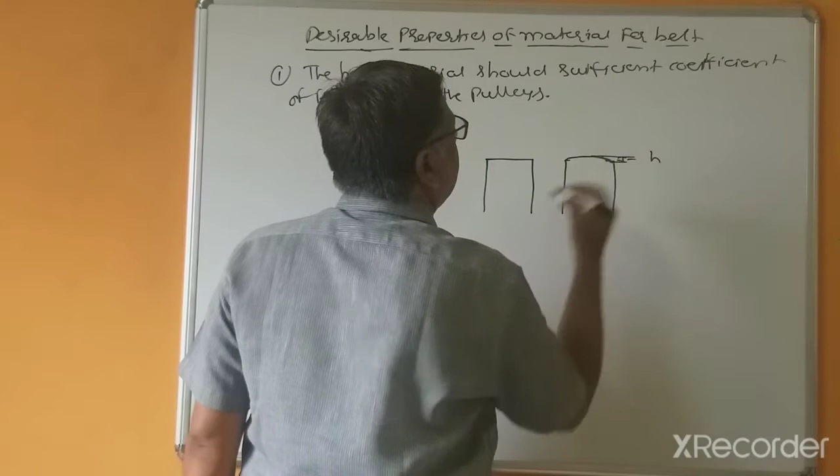So this crowning - this is called H, and this is a flat pulley, and this is a pulley with crown. This crown is for avoiding slippage. That's why here the belt runs likewise, and here belt.

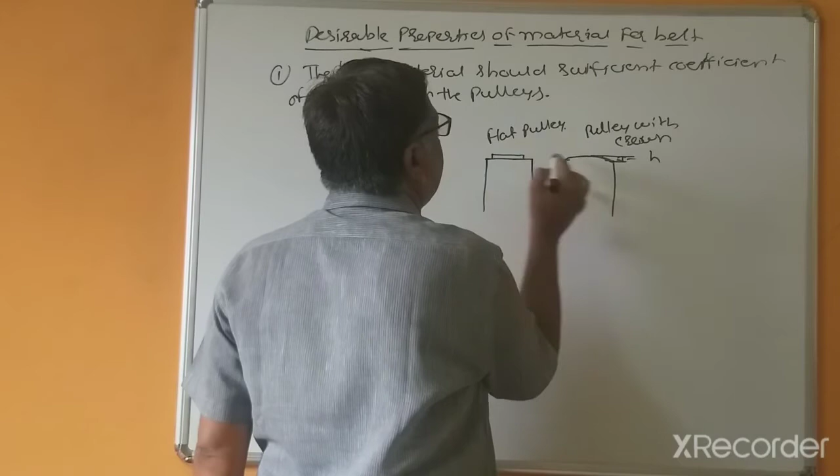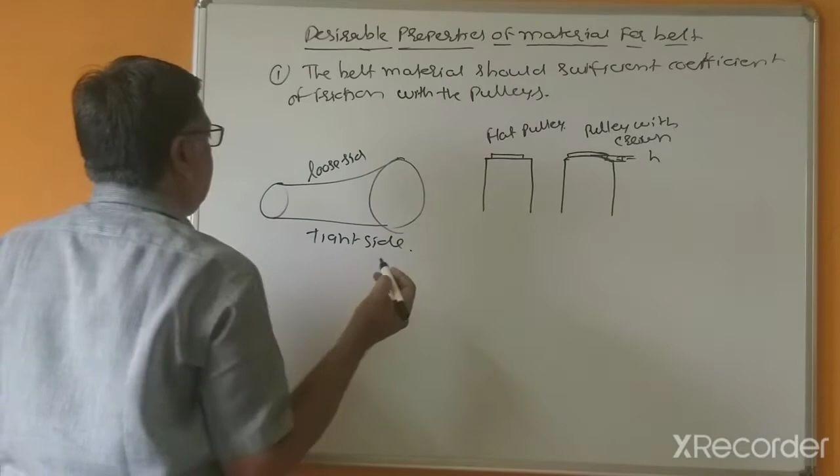That's why such type of belt drives we can use for vertical positions, because in horizontal positions - this is horizontal position - generally such type of arrangement, this is the tight side and this is the loose side. That's why this is always considered, and this RPM is clockwise.

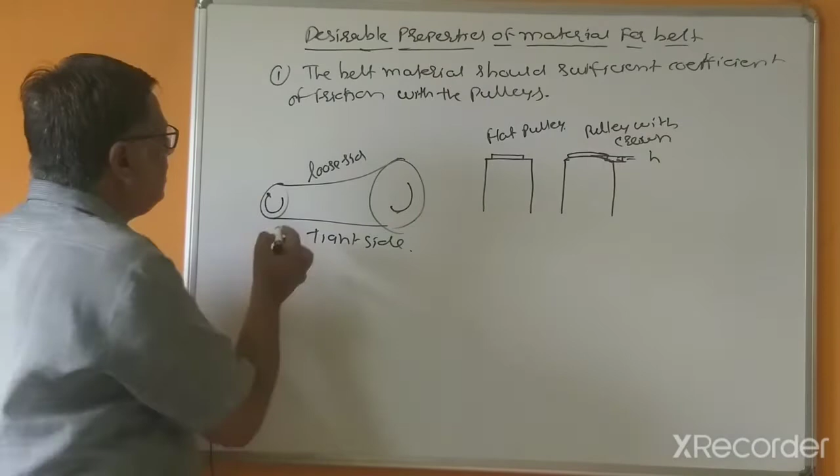Why is this clockwise? Because this is the gripping side, so this is tension - here tension - and this you can say is the slack side, and this is the tension side.

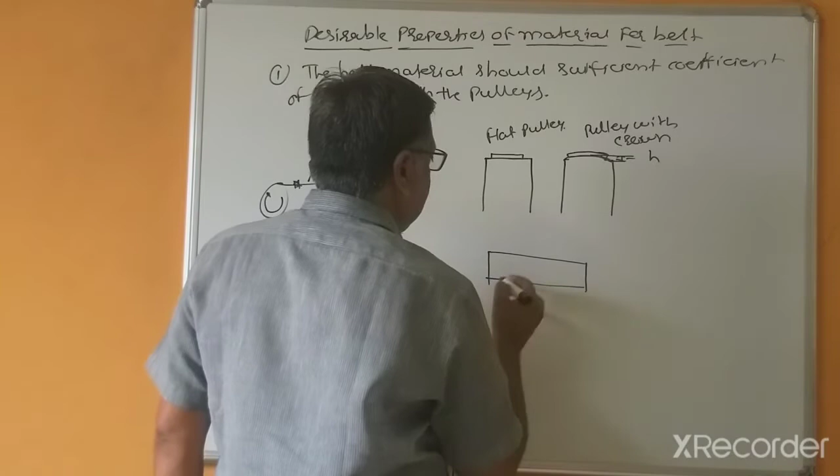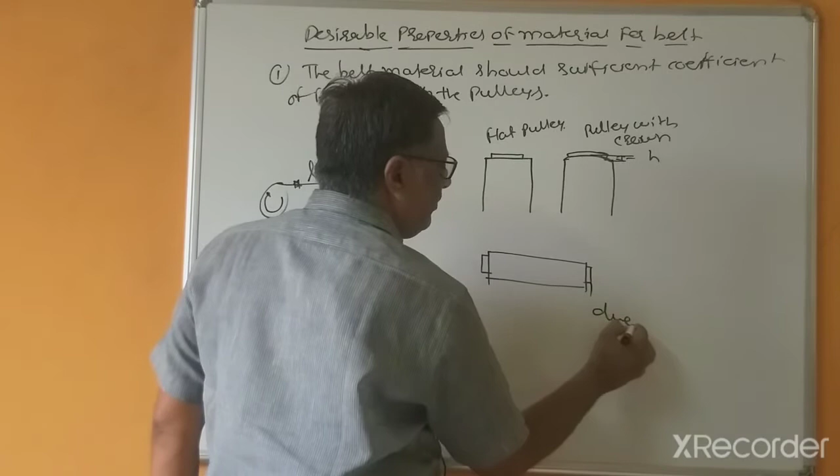So this is the horizontal drive. But in vertical drive, the pulleys are mounted likewise, and the belt runs in this way. Because of the gravitational force, due to gravitational force, the belt may come out. That's why this is the vertical arrangement.

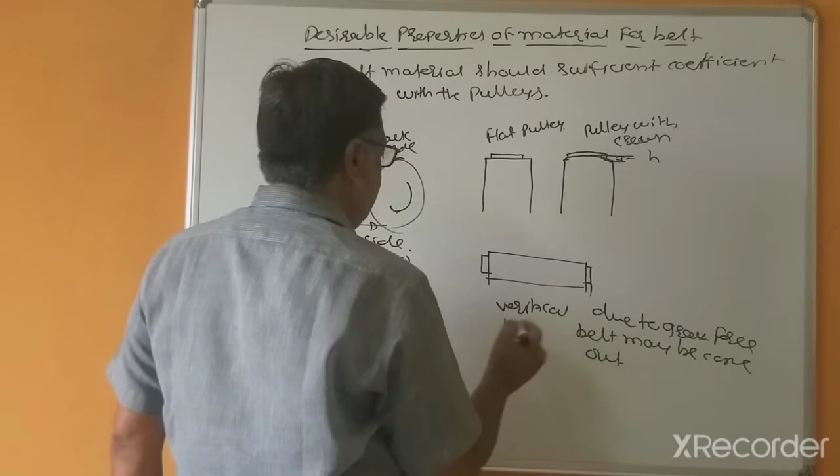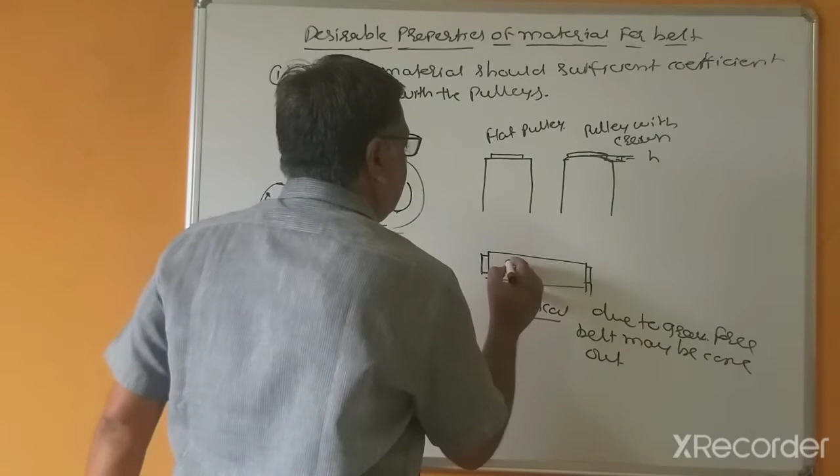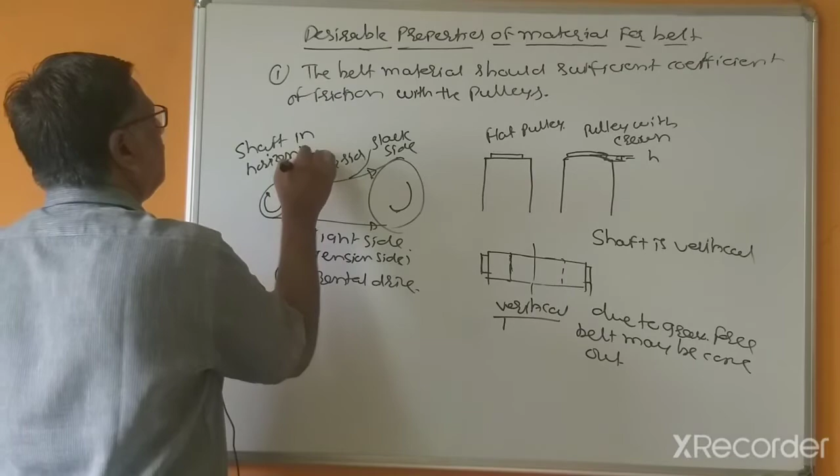Vertical - this means the face is vertical, and this pulley surface also is vertical, and this is the smaller pulley, and this is the center. The center means the shaft is vertical, and here shaft is horizontal. So in this case the shaft is horizontal, likewise shaft. In this case the shaft is vertical, and that is the pulley, and this is the belt.

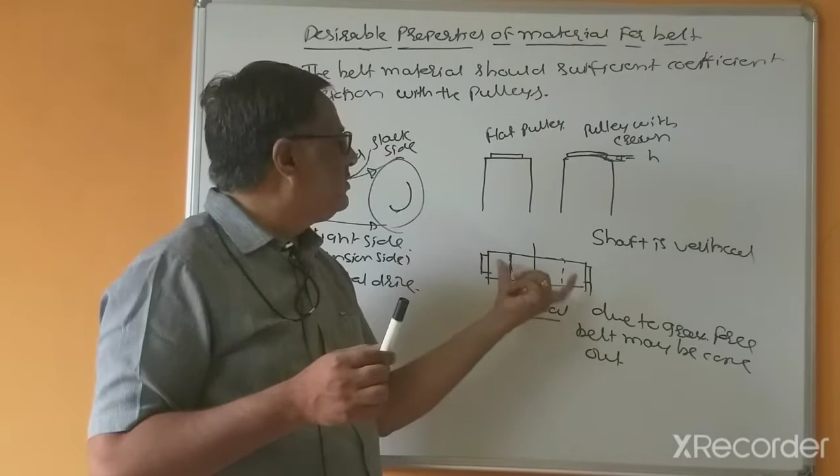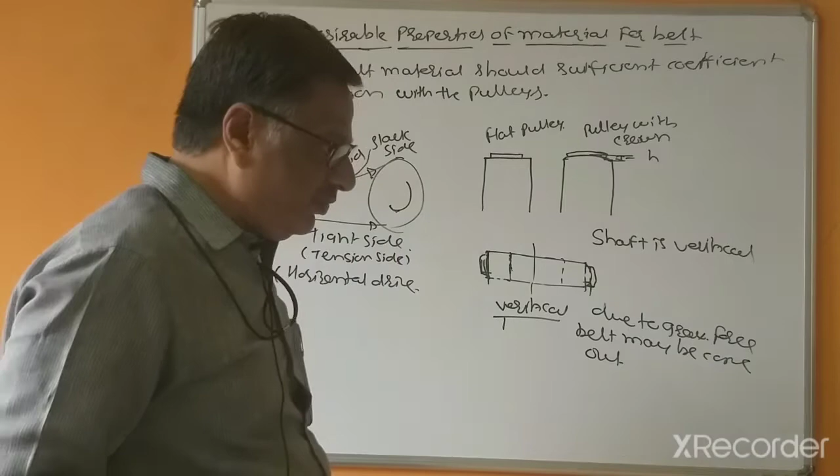So in this case, the belt may come out. To avoid that, crowning is required here. Because of the crowning, the belt runs likewise. That's why the chances of the belt coming out can be decreased by increasing the crowning.

So the belt material should have sufficient coefficient of friction. If the coefficient of friction is more, there is less slippage, and you will get more efficiency.

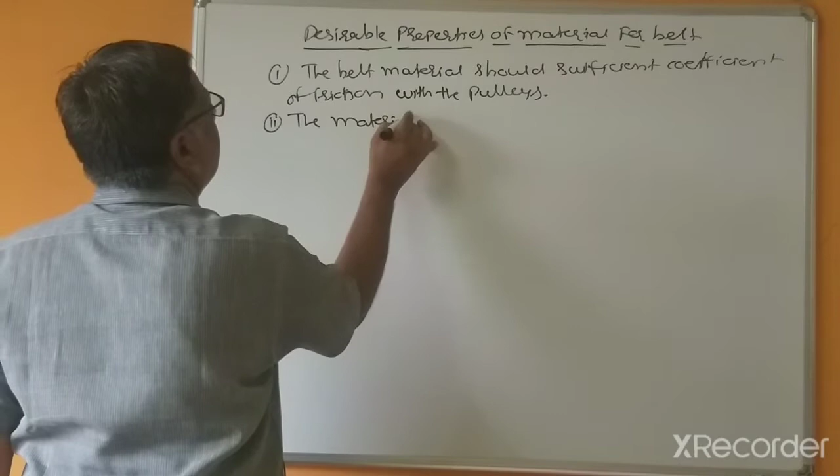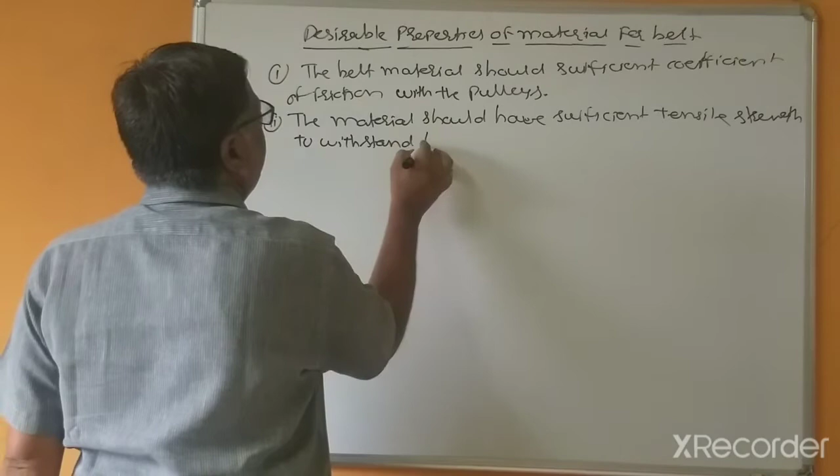The belt material should have, second, sufficient strength - sufficient tensile strength. There is no need of compressive strength here; tensile strength is very important, because belt tension is to be applied to withstand belt tension, since tension is applied to avoid slipping. That's why tensile strength is important as compared to compressive strength.

As per the considerations of these points, selection of the material - that is leather, rubber, etc. - we will see after completing these desirable properties of the belt material. The belt material should have high wear resistance.

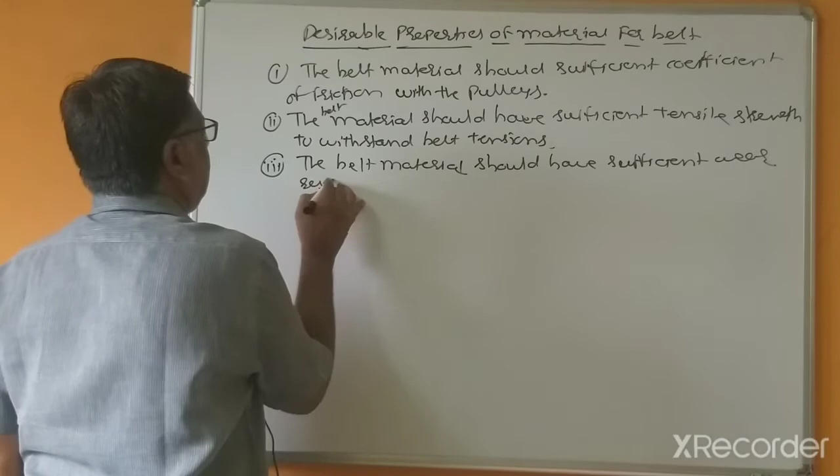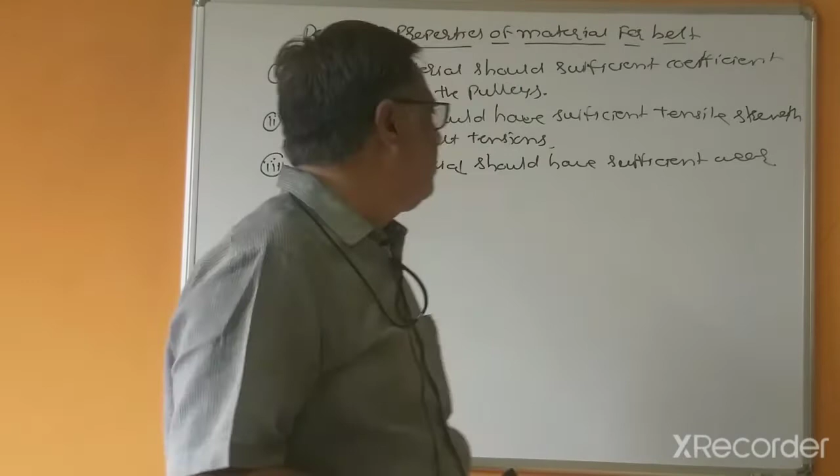The belt material should also have sufficient wear resistance. Otherwise, if the wear resistance is low, the chances of wear rate are more, and because of the wear rate, failure of the belt occurs - wearing indicates tensile strength decreasing, because wear rate increase means cross sectional area decreases, and it loses its tensile strength, after which the belt may fail. So this point also is to be considered.

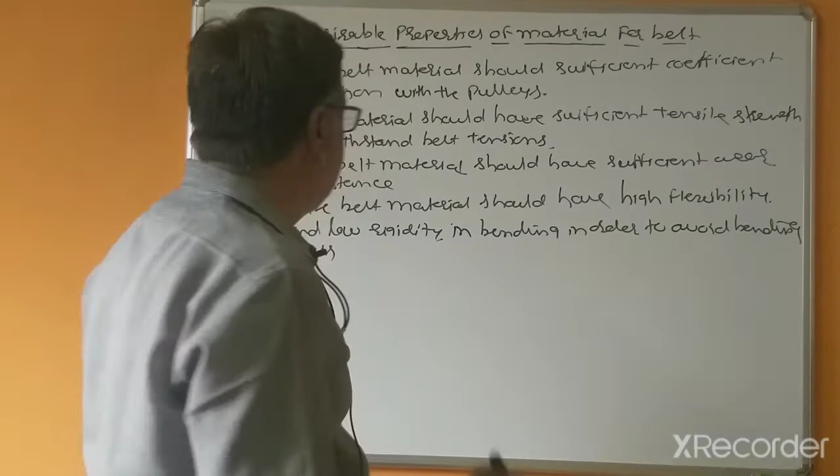Fourth point: the belt material should have high flexibility and low rigidity. This is as per the considerations of bending stress - rigidity in bending - in order to avoid bending stress while passing over the pulley. So this is bending stress, and another term that occurs in the belt is creep, which we will see after completion of the belt material topic.

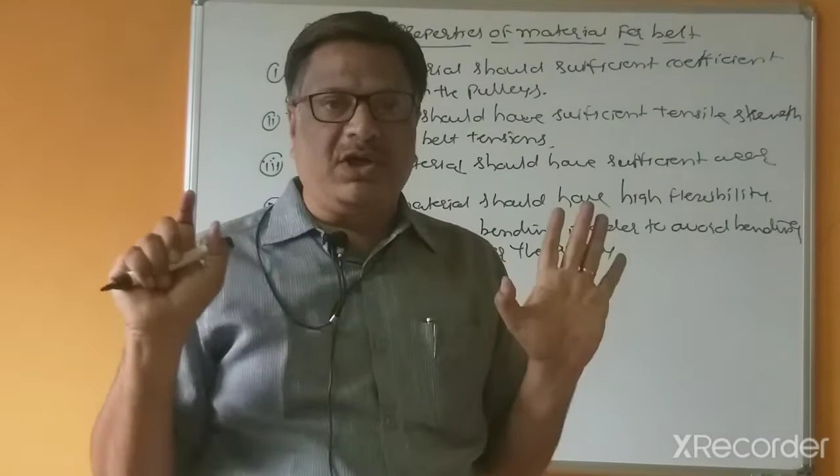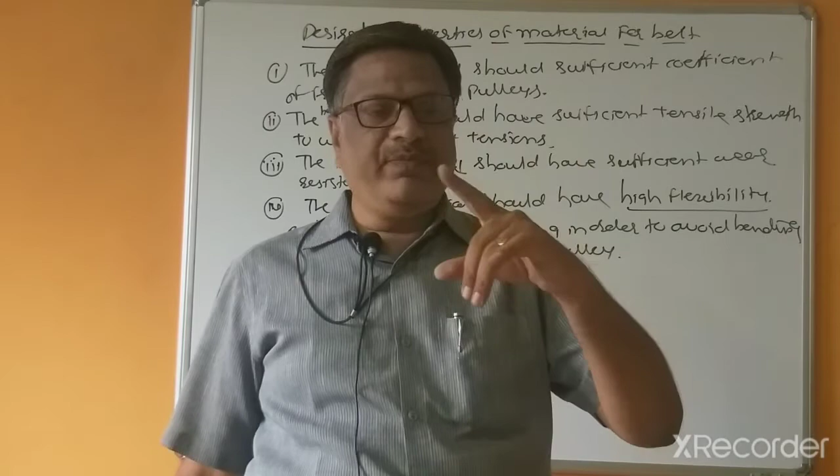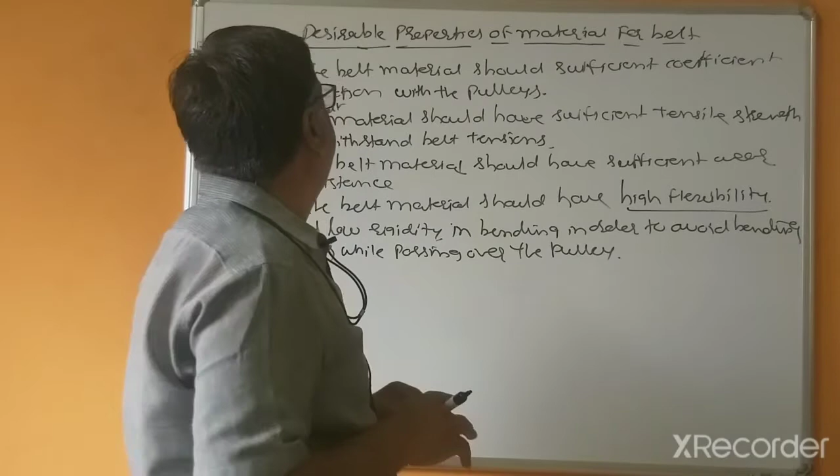So these are the four desirable properties of the materials. The belt material should have high flexibility and low rigidity. Low rigidity means it should be flexible, having more ductile properties. High flexibility means more ductility of the material is required. Otherwise, if the material is rigid, meaning rigidity is more, then due to bending in 180 degrees as the belt material passes over the pulley, the bending stresses will be more. So these are the 4 points to be considered, the desirable properties of materials for belts.

Now, what are the different types of belt materials? The belt material may be: material for belt - leather, rubber, canvas, fabric. So broadly, this is...

This is leather belt, and here we consider fabric rubber belt - this is given in the books. Canvas - such type of belts we can also use for flat belts. Leather belt. Now, leather belts or fabric rubber belts.

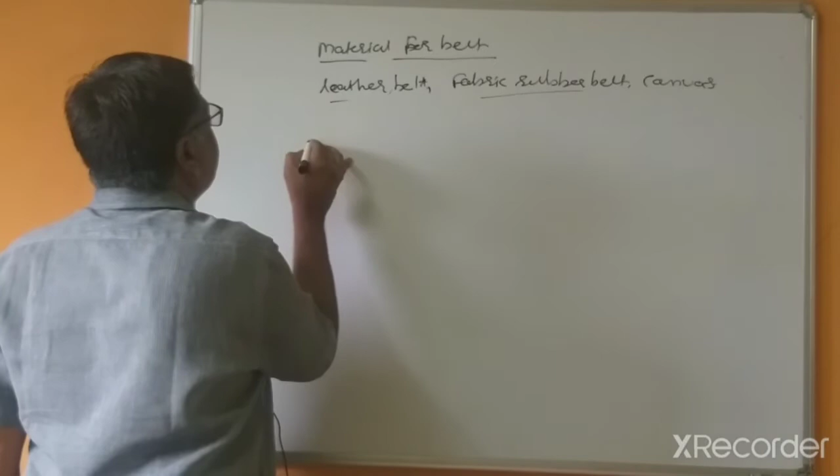So here's the number of layers: single ply, meaning only one material, and double ply, meaning made from two different materials or the same material - this may be leather and this may be rubber. For increasing its strength, rubber material can be used, and then triple ply.

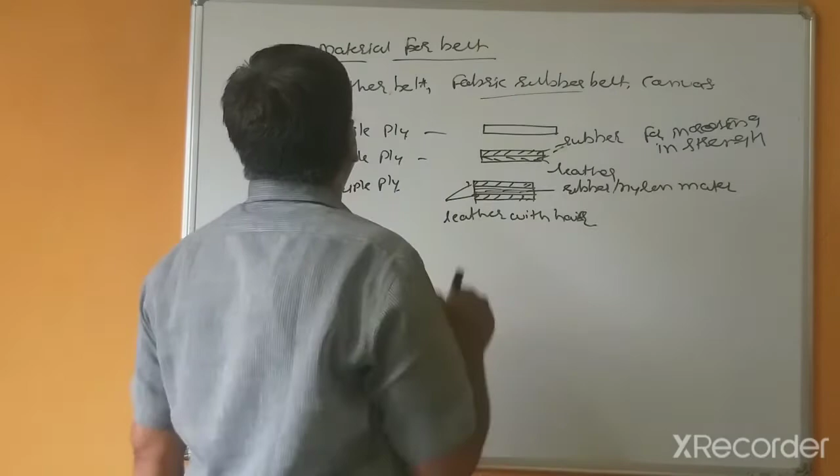So for triple ply: this is rubber, nylon material, and this is leather with hair. So this is leather with hair - such type of material we can use to increase the coefficient of friction. So these are the materials: leather belt, fabric rubber belt, canvas belt.

So this is a single ply belt - generally this belt is the popular belt, used in olden days in flour mills.

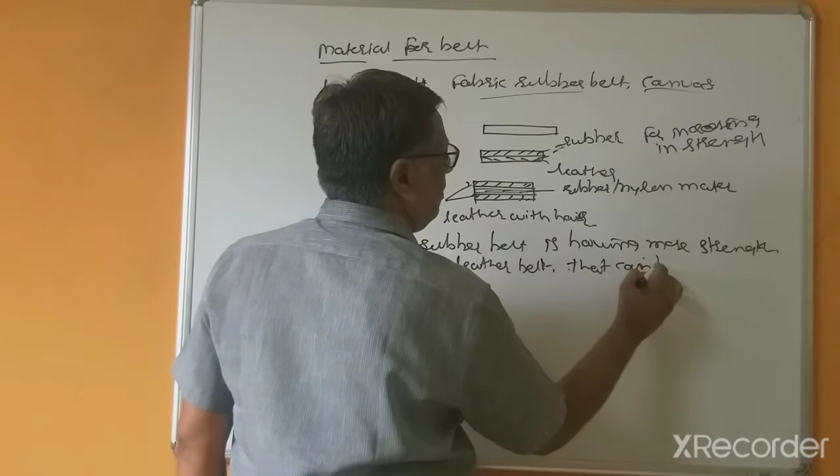As compared to leather belt, fabric rubber belt has more strength compared to leather belt. So that's why it can be used for higher speed, and that can be used for higher speed.

So what are the types of joints? There can be three types of joint. So types of joint: this may be factory jointed belt - this is ready-made - and shop floor joining of belt. So some belts are factory assembled, this may be an endless belt which is ready-made available, and in shop joining, this is the cemented type. Last joint - I think this is the hinged joint. So these are the three types of joint.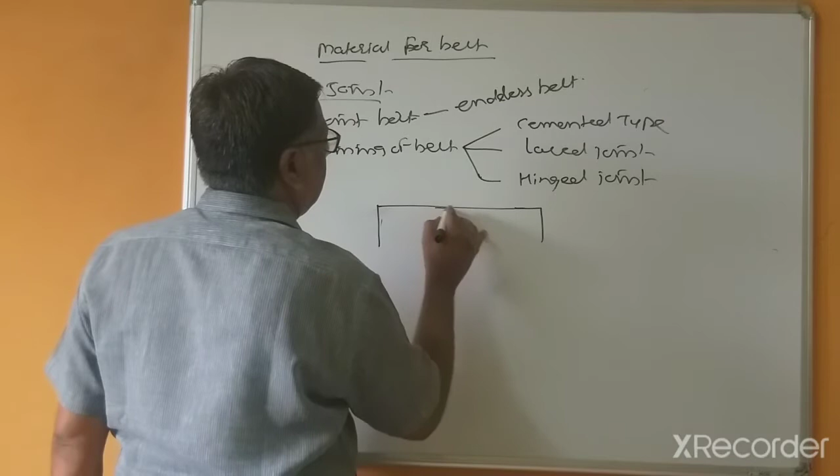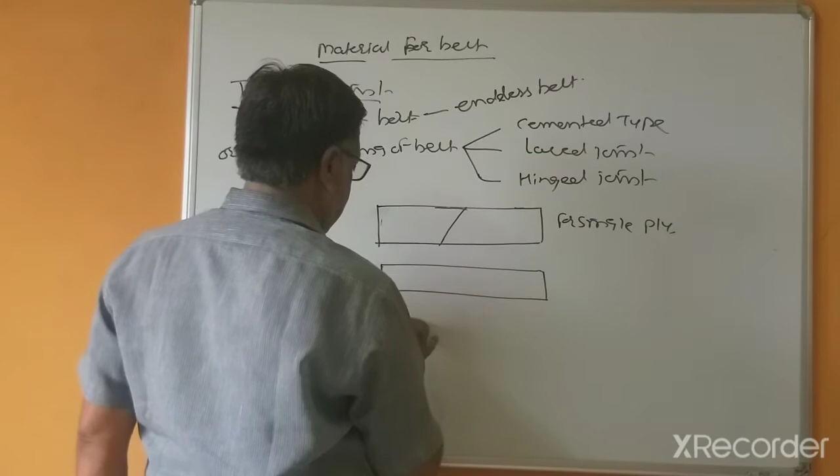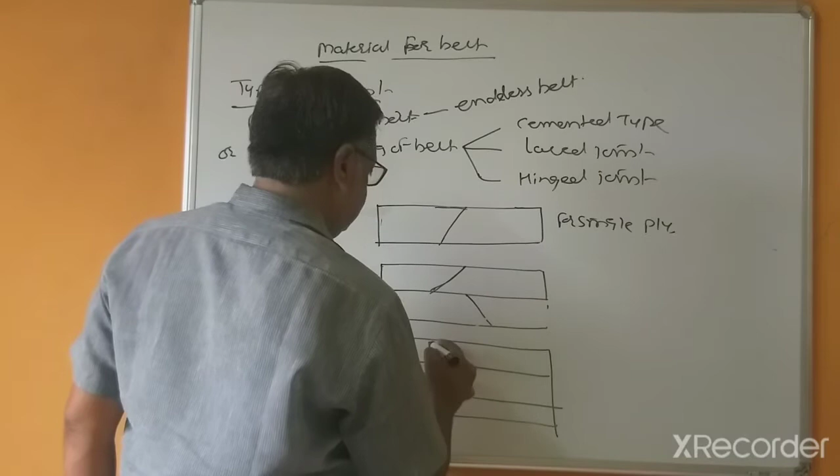In the cemented joint, suppose this is one layer that is to be joined. So likewise, this is for single ply, and if two plies, if this is the other type, likewise, and this distance is 100 mm, 200 mm, likewise - this is one, remove, after that join, and for triple ply, if this is likewise again, this is for three ply. So these are the cemented joints, this is for double ply.

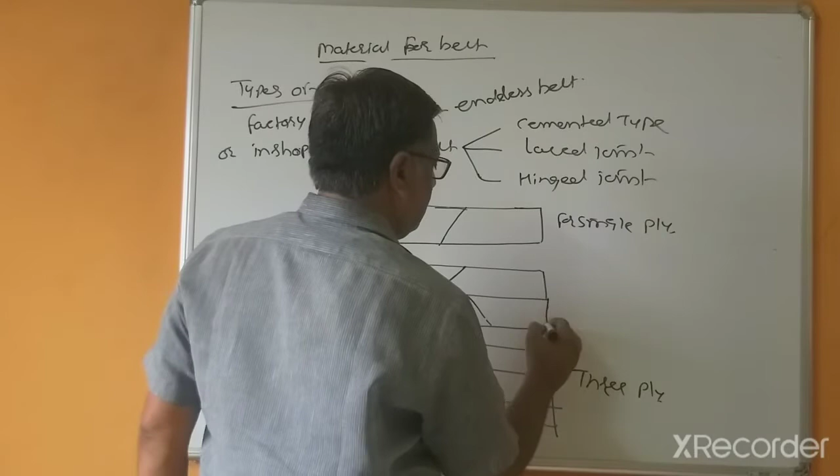So this is cemented type - cemented type means using gum or paste, this is to be pasted. So one cut.

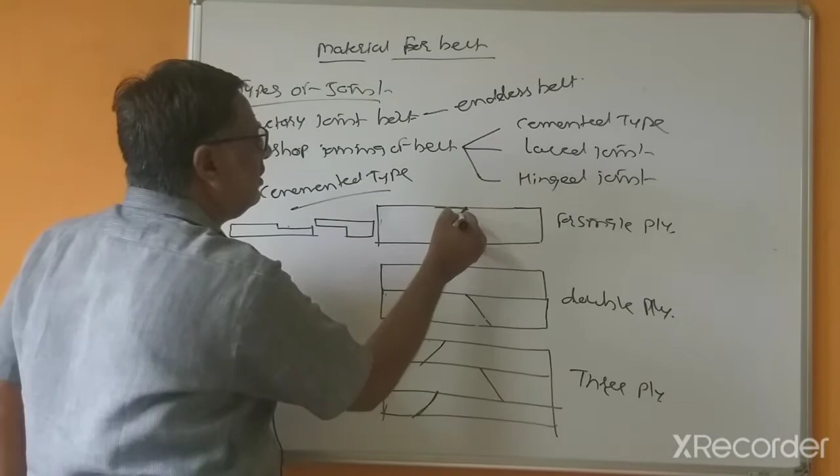Suppose this is the cross section. This cross section is to be worn out, and another portion, and after that this is to be joint likewise, and this is to be pasted by using adhesive. So cemented joint means joining of material by using adhesive.

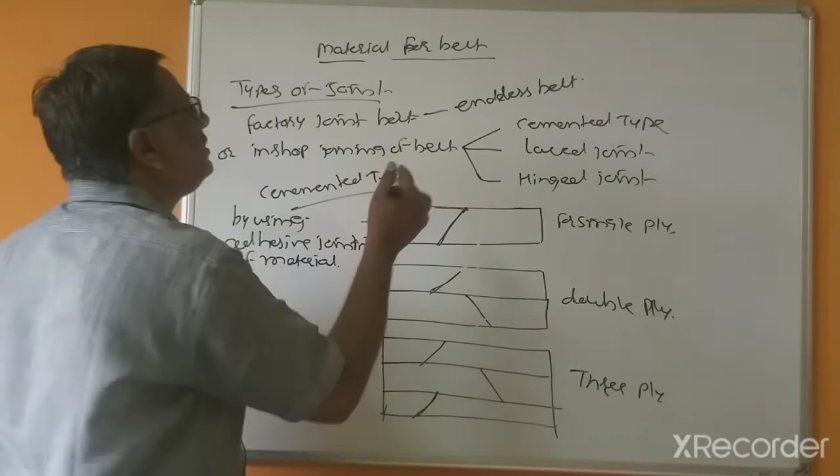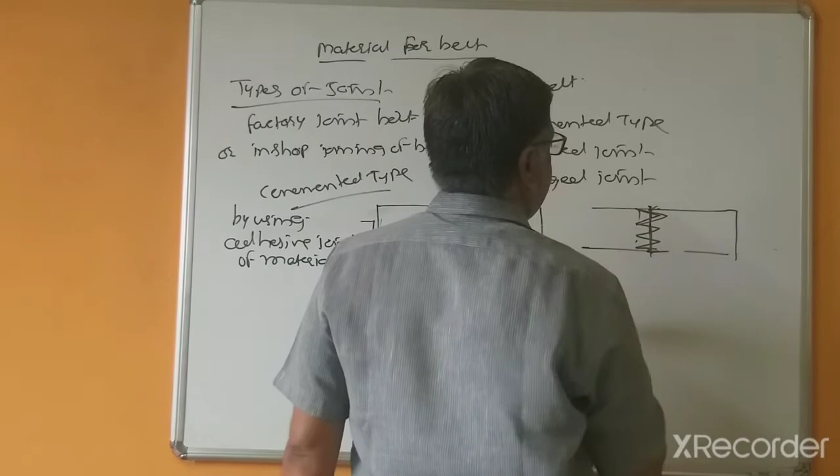This is at shop floor, this is cemented type. In laced type means, suppose this is one material and this is another material. This is to be zigzag type likewise. So by using such type of lace, and this is maybe pin to be inserted here, otherwise

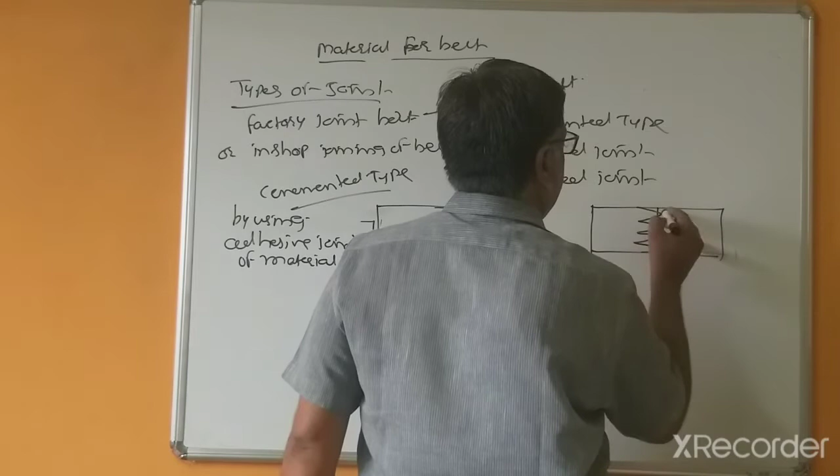likewise, and here pin is to be inserted in between. So such type of materials are called laced joint. So this efficiency is, for this efficiency 80 to 85

I think, and this is less up to 50%, and for this hinged joint means by using bolting, such type of hinged joint. So this efficiency is less, around 25% efficiency.

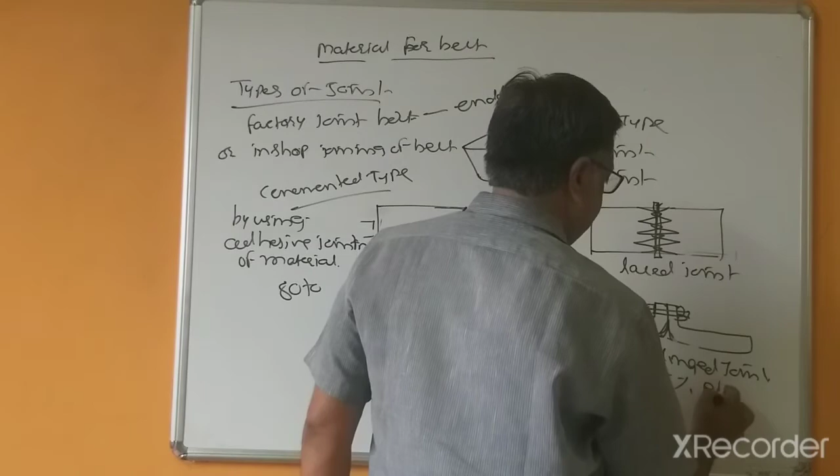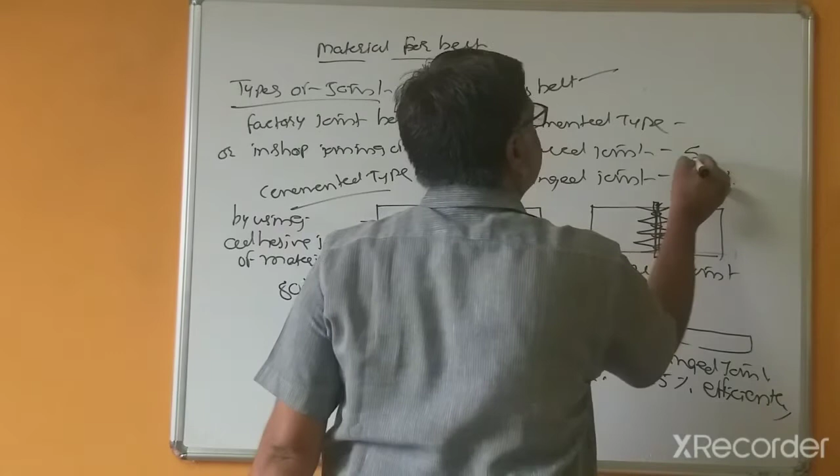So this efficiency factory, and this is more, and this efficiency, and this is 25%. We will see for laced joint, 50%. So this is 50%, right, and this is 80 to 85%.

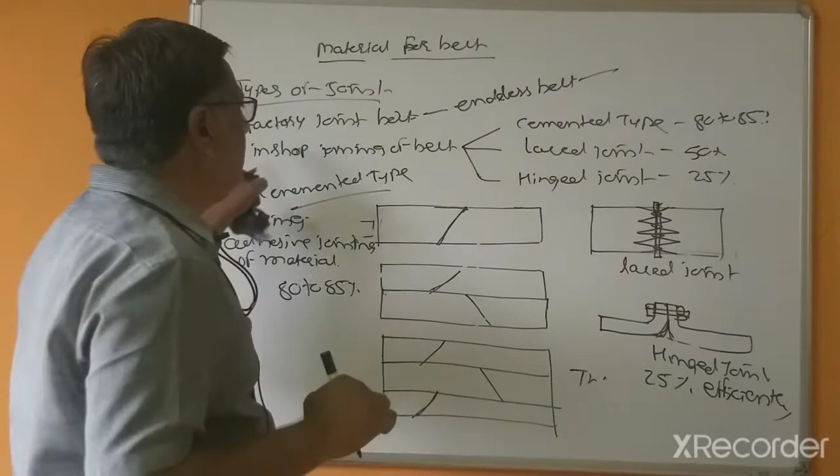This is correct. And for endless belt, this efficiency is near about 90% is the efficiency. Means efficiency means that is the strength of the belt.

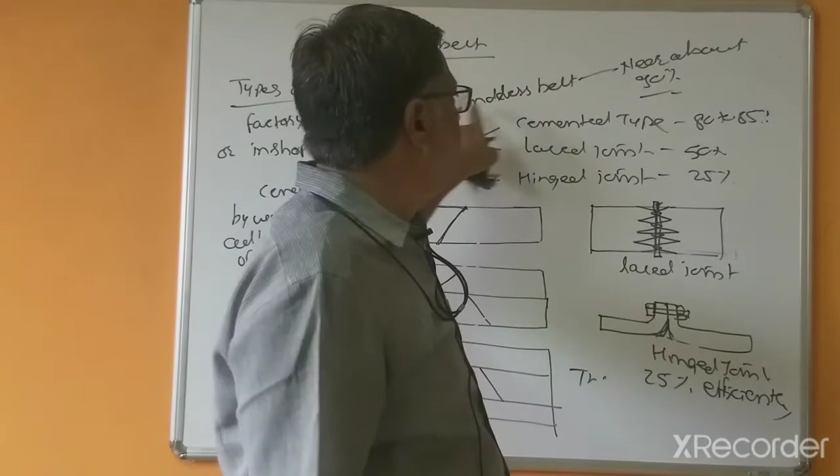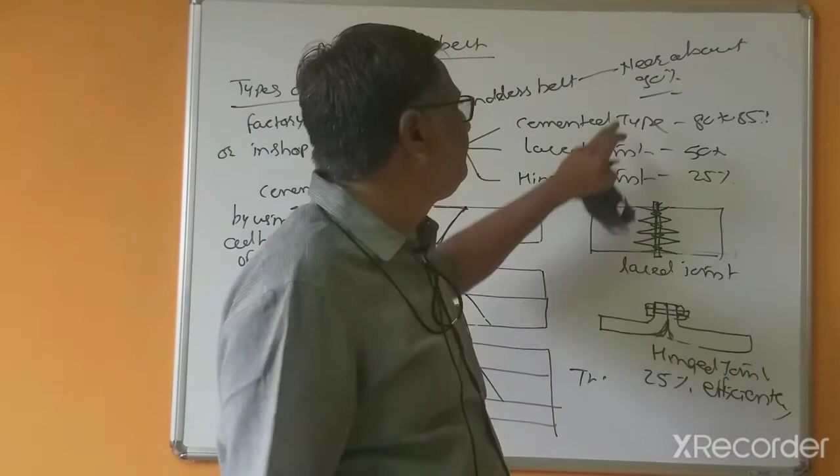So that can be sustained, suppose this is the tensile strength is 200 for endless belt or single belt. Means after joining, this efficiency means up to 180, that belt can be sustained.

This 80 to 85% means, if the 200, so this may be 160 to 170. 50% means this is 100 megapascals, and hinged joint means this is 50 megapascals. So these are the different types of joints that can be used in the belt drives.

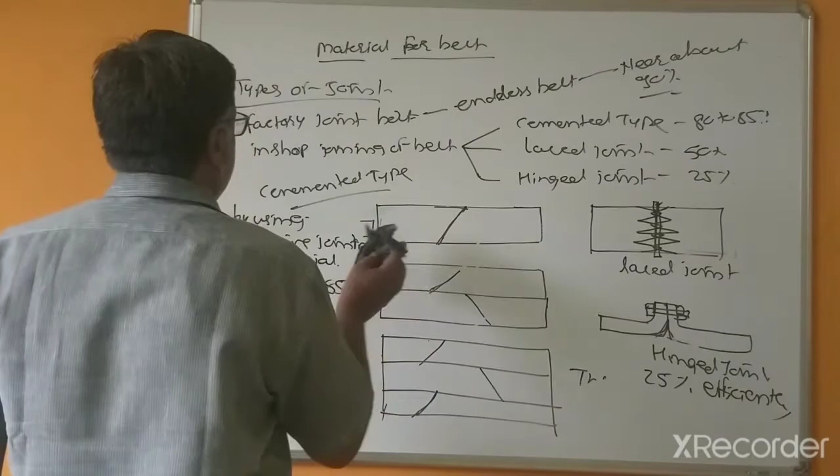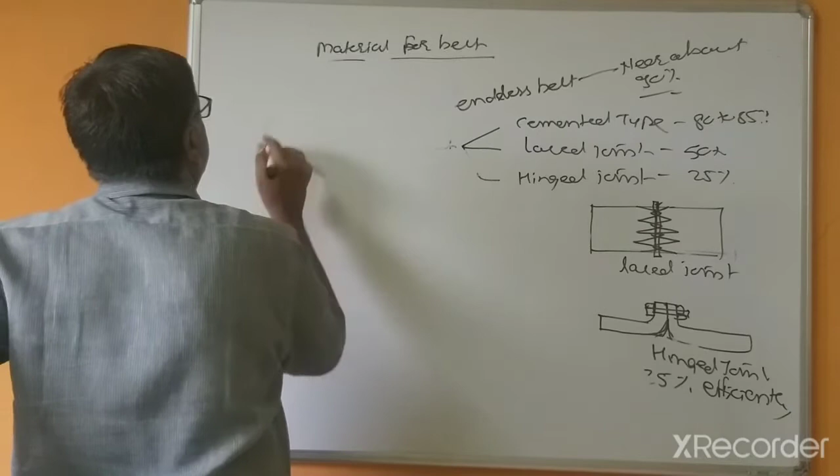And in V-belt drives, generally the materials used are rubbers, such type of cross sections, trapezoid, and here this material is rubber, and here these are a rubber cord.

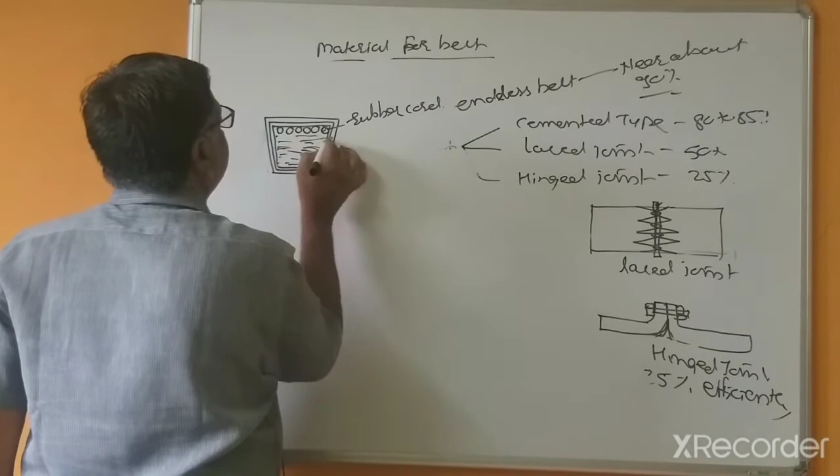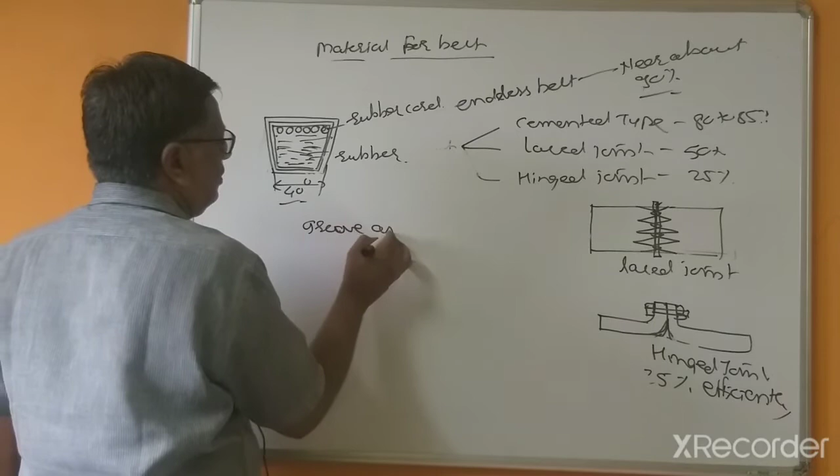This is a rubber cord to increase the strength, and generally this angle is generally 40 degree, and the groove angle in the pulley is 34 to 38 degree. This is 40 degree and this is 34 to 38 degree.

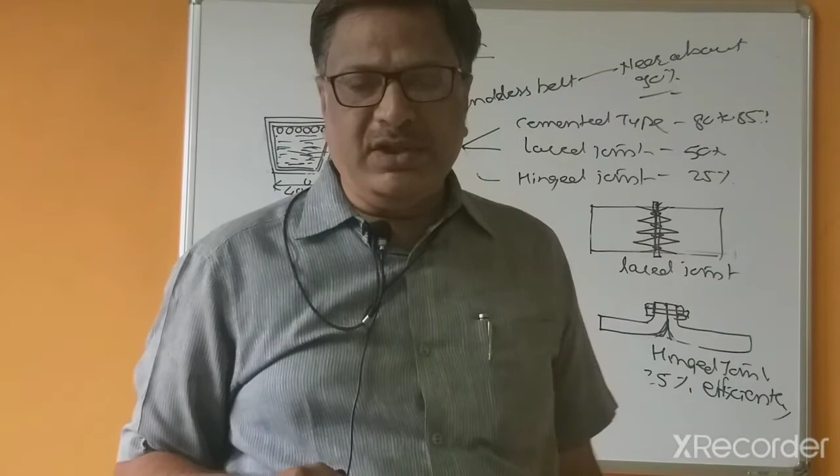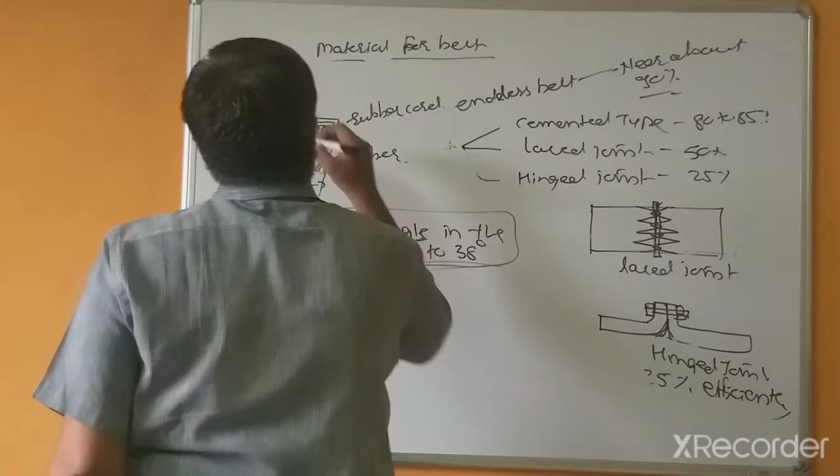And generally as per the considerations of manufacturing material, popular material for V-belt pulley is cast iron pulley, so this is rubber covering rubber.

So next is another important term that is to be used in the belt drive is creep. So what is the meaning of the creep?

Suppose this is pulley, this is driven pulley, and this is a drive pulley. So this arrangement is not correct. So actually, this is the arrangement.

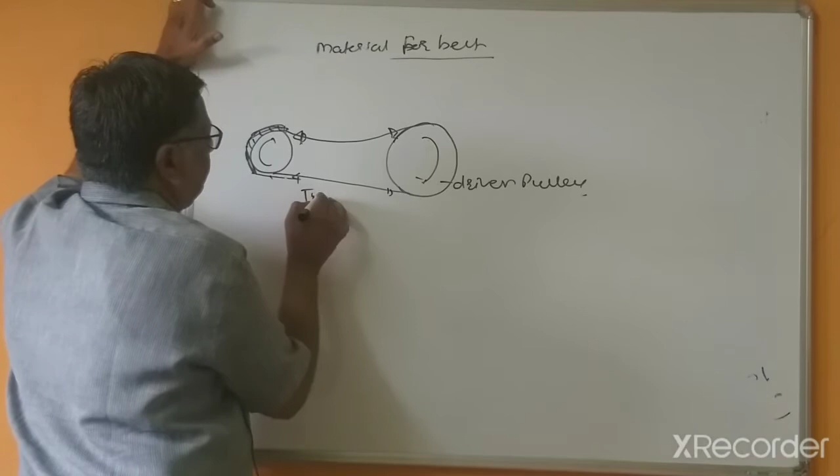So here, during running condition, this is tight side and this is slack side. So as you know, this is the tension. Suppose this is T1 and this is T2.

If the tensions T1 and T2 is lower than the rim resistance -- rim resistance means this is the surface of the pulley along with the belt -- so that resistance is less, means this difference T1 T2 is lower than the rim resistance force. So what will happen? Slipping will occur.

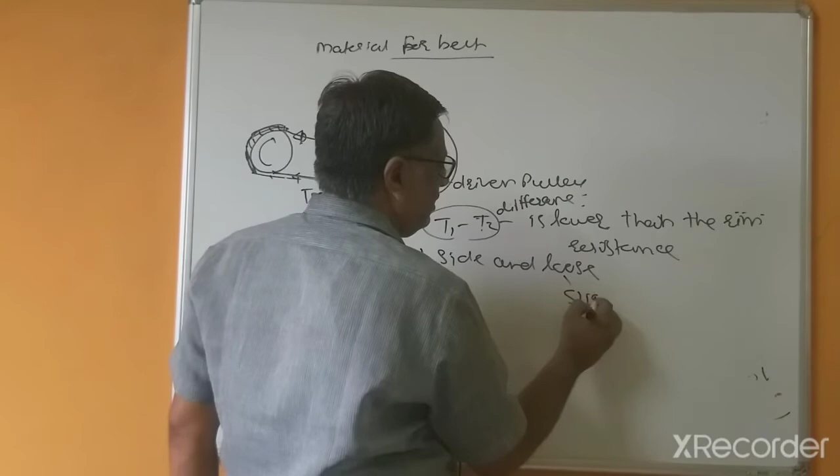Now because of the tension, tight side and loose side, what happens? Because of the tight side, the material is in expansion, and here loose side is slightly in contraction during releasing of the pulley surface.

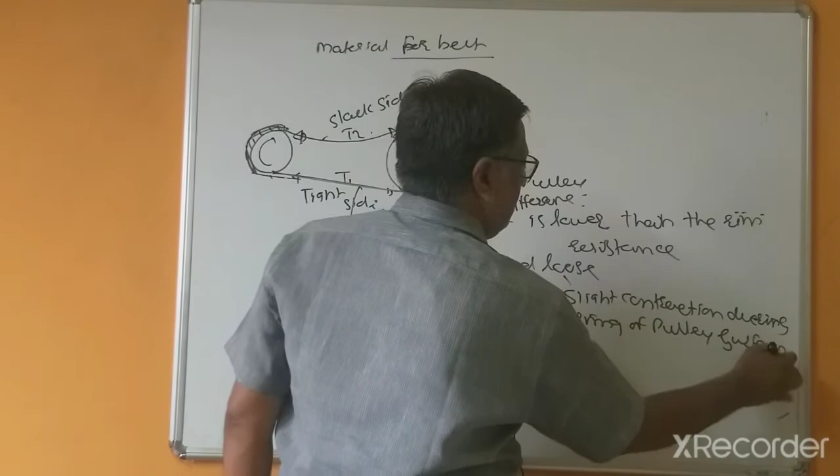So what happens? This is the expansion, means this is tight side, and during releasing of the pulley surface, this is the contraction of the materials. So because of this expansion and contraction, the stresses induced in the belt, and that stress is bending stress, and that is also called sometimes creep.

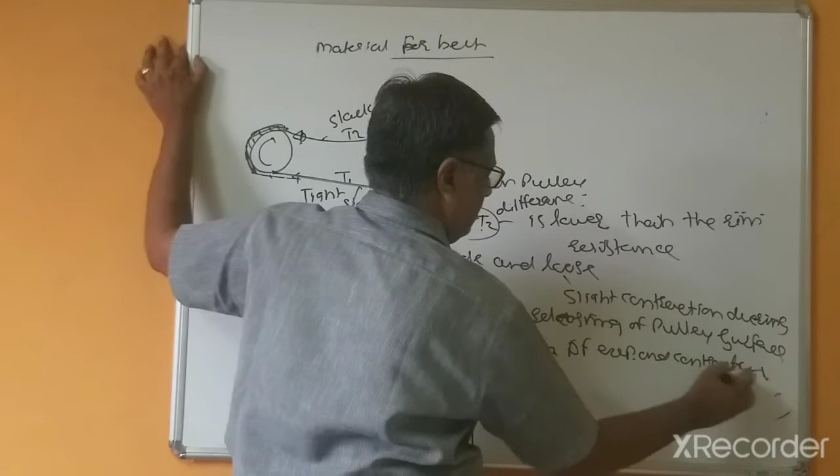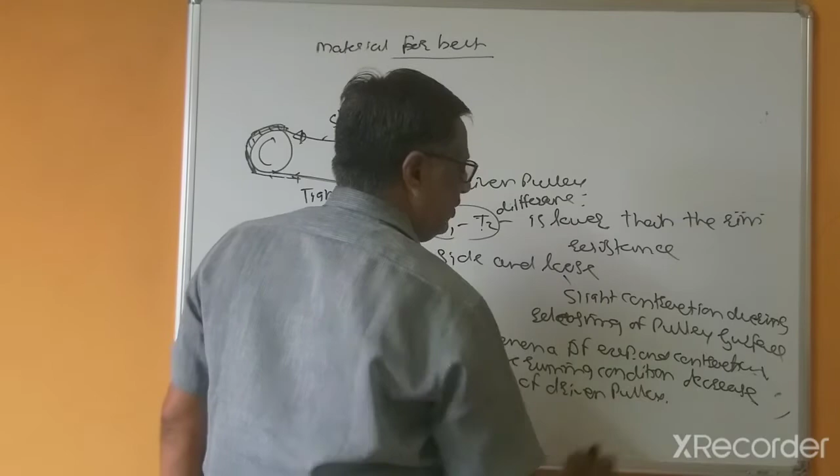So because of the creep, this phenomena of expansion and contraction during the running condition decreases the speed of the driven pulley, and this speed of the driven pulley decreases, and the speed of the belt also decreases, meaning 1 to 2% speed decrease.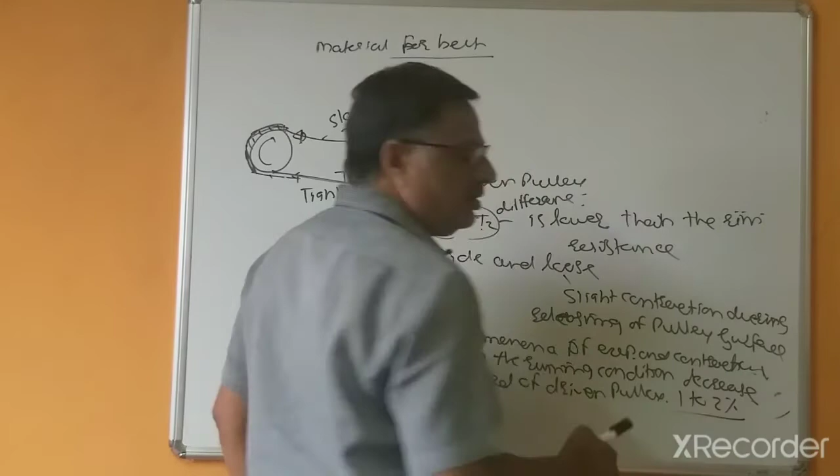So that's why because of the creep, the efficiency of the joints -- efficiency of V-belt is around 94% and efficiency of flat belt is 95 to 96%. So always remember, the efficiency of the flat belt is more as compared to efficiency of the V-belt, because of the creeping of the belt. So because of the creeping, expansion and contraction of the belt, this is in the V-belt. So generally occurs in the V-belt.

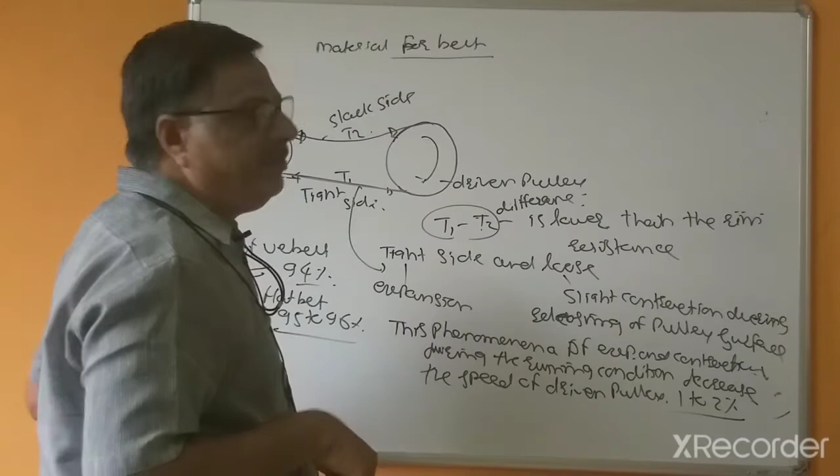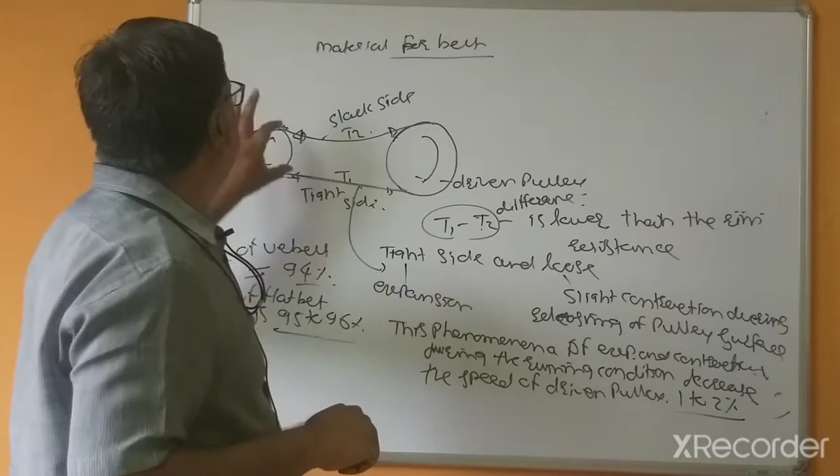So next article of our fourth unit is the chain drive.

In chain drives, there are two different types of chain drives. One is the link chain and another is the roller chain. Link chain can be used for lifting of load, and roller chain for power transmission, likewise in bicycles, motorcycles, etc. This link chain...

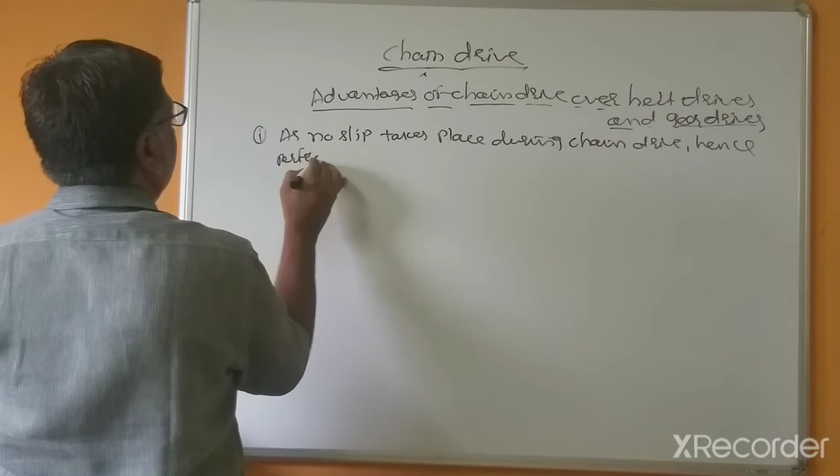As no slip takes place during chain drive, hence perfect velocity ratio - but this wording is not proper, so I will change it because I am not satisfied. This is not perfect velocity ratio, because here the polygonal effect is to be considered - you will not get a constant velocity ratio by using chain drives.

Chain drives can be used for small or long center distances. They are particularly suitable for medium center distance, because in gear drives there is very small center distance, and in belt drives the center distance may be up to 10 meters also - that's about 30 feet.

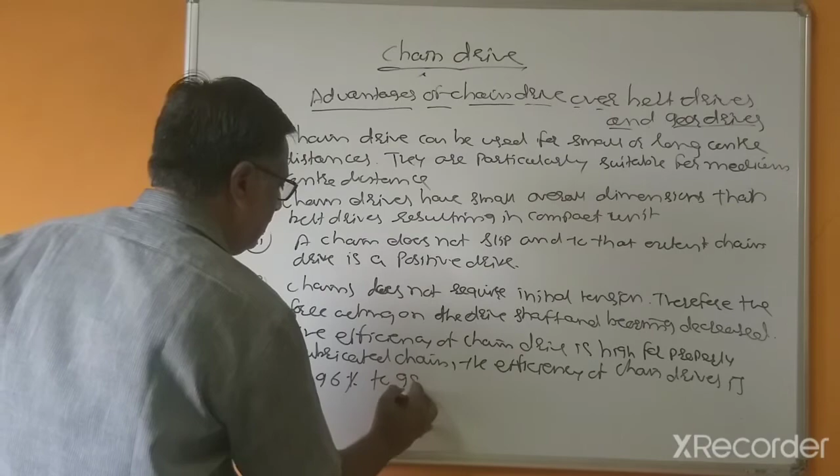Next, the efficiency of chain drive is high for a properly lubricated chain. The efficiency of chain drives is 96% to 98%. So this is the efficiency of chain drives. So next advantage.

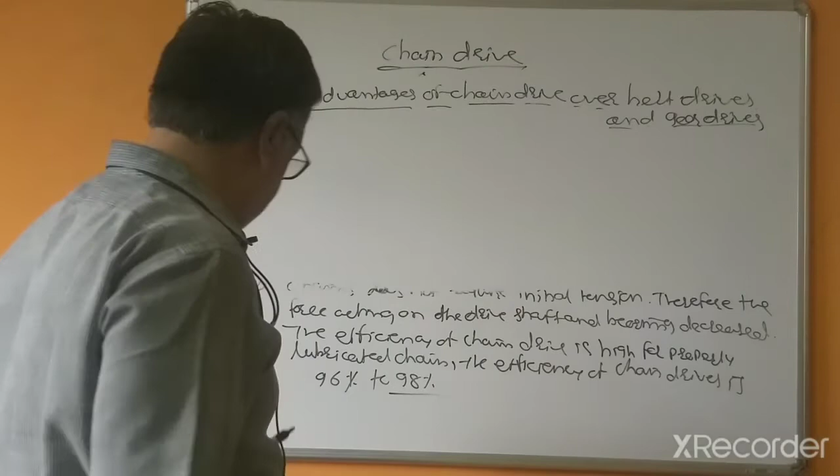During examinations, such type of advantages may be asked. Chains are easy to replace.

Next is the atmospheric conditions and temperature. These do not affect the performance of chain drive, and they do not present any fire hazard.

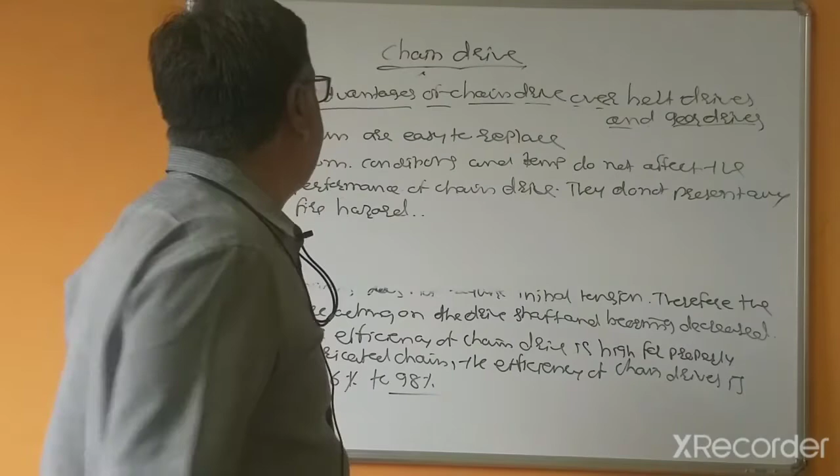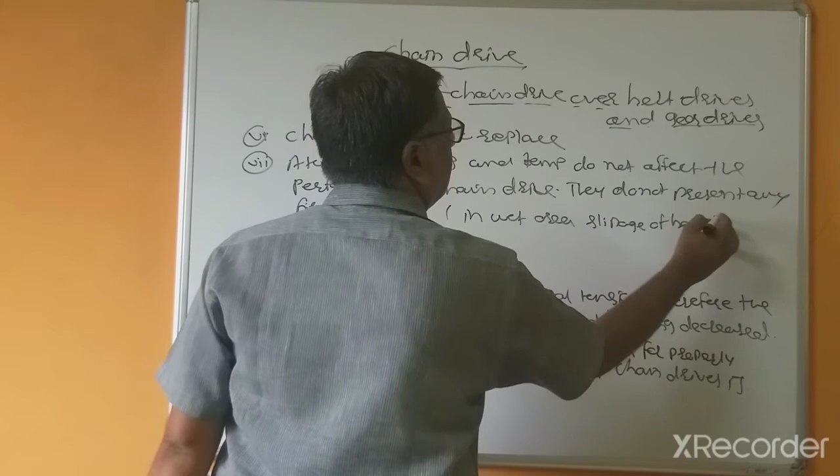What does this mean? Atmospheric conditions and temperature do not affect the performance of chain drives because atmospheric conditions means in dusty areas there is slippage, or in wet areas, because in wet areas slippage of a belt is increased, and that is also a fire hazard.

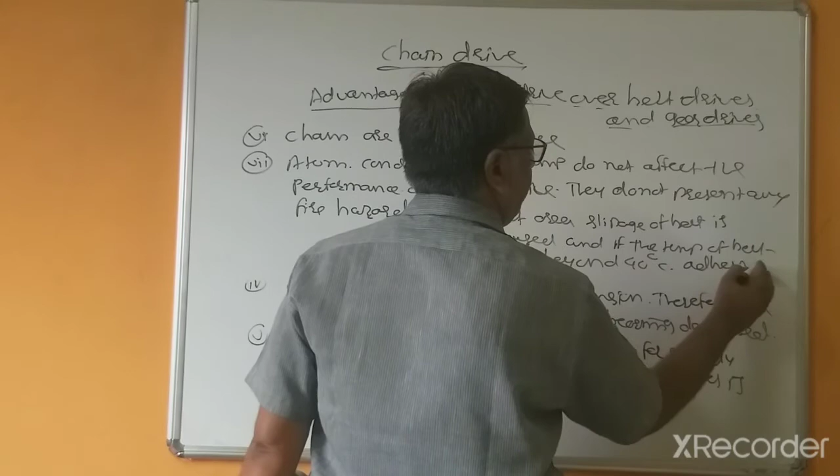And in some cases, if the temperature of a belt increases beyond 40 degrees centigrade, the adhesive loses its property.

This is additional information I am giving you. So if the temperature of the belt increases beyond 40 degrees centigrade, the adhesive or gum loses its property, and the belt may fail. Also, because of wet areas, slippage of the belt occurs. These conditions are not present in chain drives.

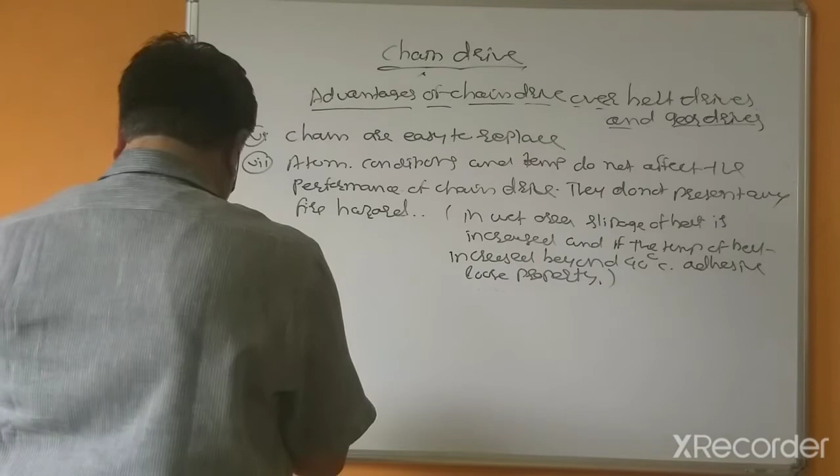So these are some of the advantages. Now, disadvantages of the chain drive over belt drives and gear drives. After this I can complete today's lecture, and the remaining portion we will continue in the next class.

Chain drives require housing. This is because the lubricated chain may lose its property if dust and dirt accumulate. That's why chain drives require housing.

Chain drives operate without full lubricant. Full lubrication is a condition found in the gearbox of gear drives.

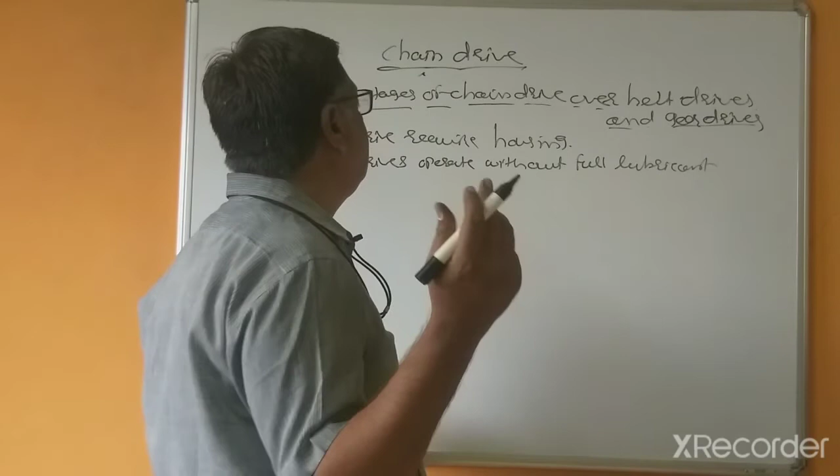Between the joints, unlike gears, this results in more wear in the joints. Because the chain is not fully lubricated, the wear rate of the chain drive is more compared to the wear rate of gear drives.

The third disadvantage of chain drives over belt drives or gear drives is that chain drives are only suitable for parallel shafts. Chain drives are not suitable for non-parallel shafts.